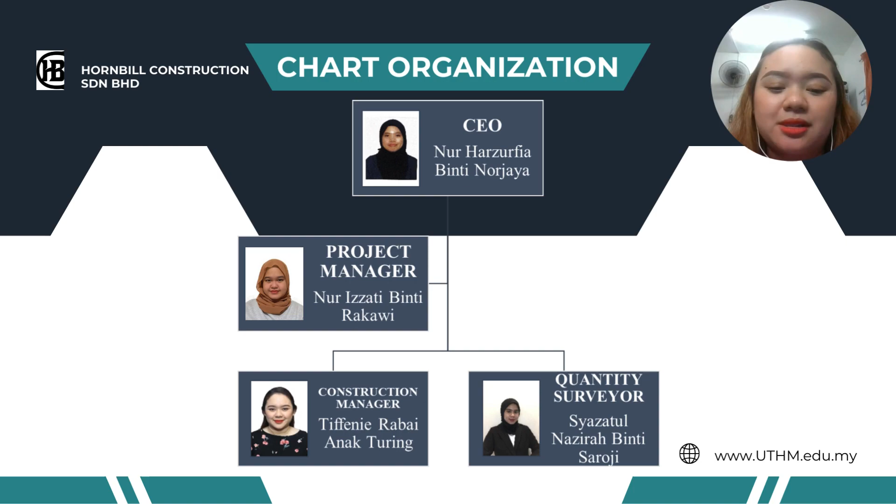First of all, before we start our presentation, I would like to introduce my group members. The first one is our CEO, Nur Harzurfia binti Norjaya. The second one is Project Manager, Nur Izzati binti Rakawi. Construction Manager, myself, Tiffenie Rabai Anak Turing. Quantity Surveyor, Syazatul Nazirah binti Saroji.

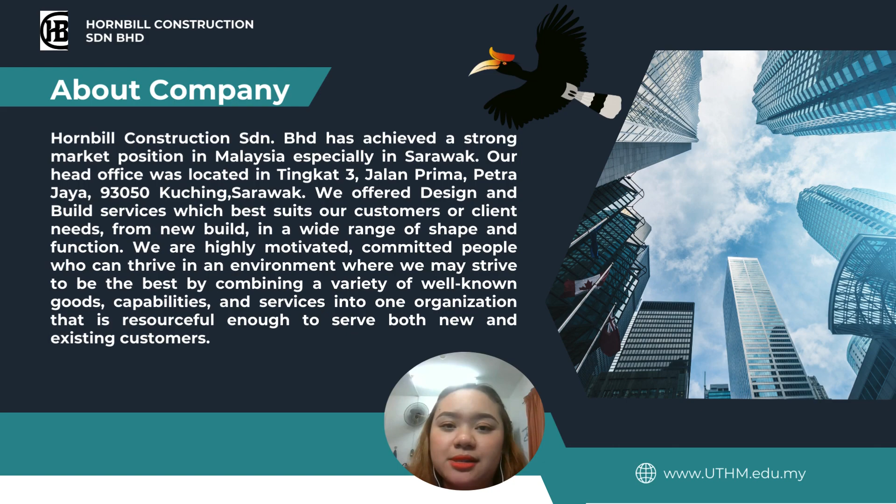About our company, Hornbill Construction Sdn Berhad, it has achieved a strong market position in Malaysia, especially in Sarawak. Our head office is located at Tingkat 3, Jalan Prima Petra Jaya 93050, Kuching, Sarawak. We offer design build services which best suit our customer or client needs from new builds in a wide range of shapes and functions. We are highly motivated, committed people who can thrive in an environment where we may strive to be the best by combining a variety of well-known goods, capability, and service into one organization that is resourceful enough to serve both new and existing customers.

Our company vision is to provide the company with sufficient competent staff, maintain a high level of professionalism, create significant added value for our clients. The last one is to advocate efficiency in everything we do to optimize productivity at minimum cost, to ensure sound corporate governance in our projects.

Our mission is to enable the organization to embrace modern management as the way of life and to be the preferred choice of engineering project management. The second one is to provide professional services by continuously making a positive impact on the industry.

The concept of the Darul Hana Development Project has become a state reference point for the ultra-modern housing industry with traditional values, because the state government was not only proposing solutions for problems faced by old Malay villages, but also seeking to protect the Malay community's cultural heritage.

According to a statement from Chief Minister Abang Johari Tunku Openg, published in Dayak Daily News, the Darul Hana project is a planned urban regeneration project for the 12 traditional Malay villages from Kampung Boyan up to Kampung Bintawa Hilir along Sungai Sarawak. In addition, this project will also be concluded with digital infrastructure, including 5G networks, in accordance with our goal of transforming Darul Hana into a smart city.

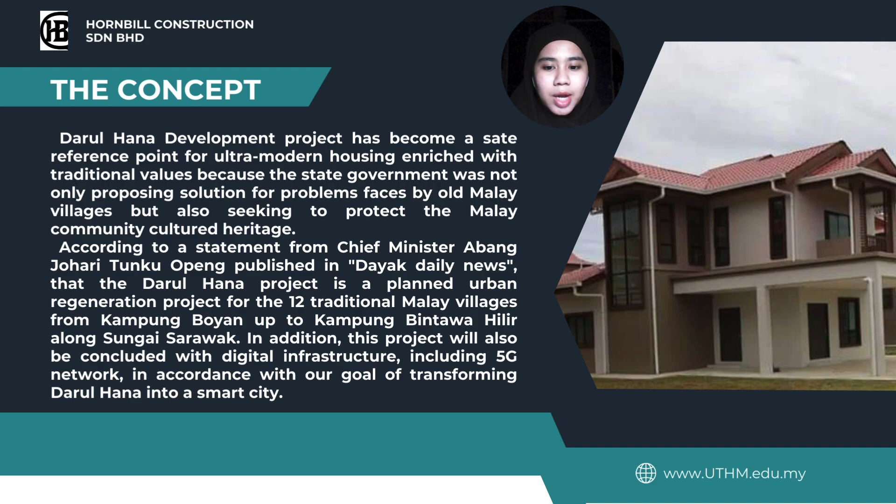Next, I will explain about the proposed proposal idea. For the proposed proposal idea, first is the size of beam, where all designs use the same beam size.

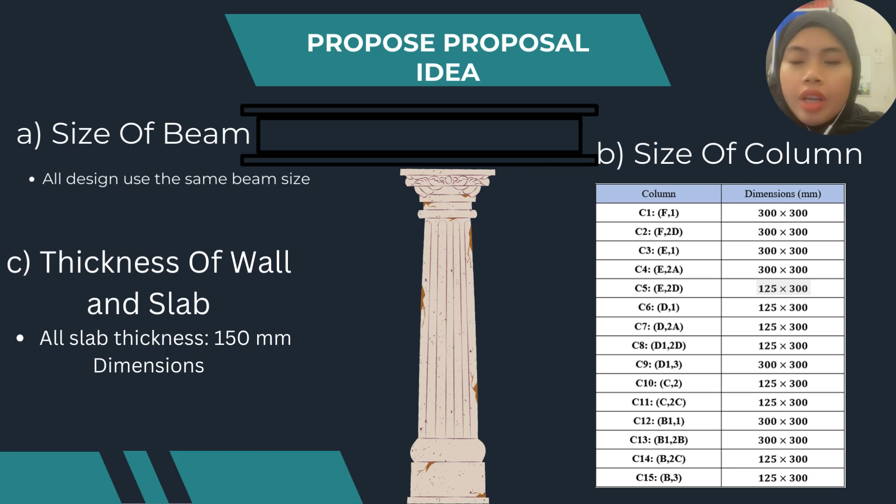Next, size of column. There are various types of column sizes, which are 300 by 300 and 125 by 300. And lastly, the thickness of wall and slab. All slab thicknesses are 150 mm.

For the manual calculation for the beam and slab thickness, the characteristic permanent load, GK, is 9.6 kilonewton per meter, and the characteristic variable load, QK, is 3.6 kilonewton per meter. For the design life, it will take 50 years, referring to the EN 1990 table 2.1, and the fire resistance is R60. This is also referring to the Uniform Building By Law. The next is exposure classes, which is XC3.

For the materials, the characteristic strength of concrete is 20 Newton per mm square, and the characteristic strength of steel is 500 Newton per mm square, and for the strength of link we take 500 Newton per mm square, and the unit weight of reinforced concrete is 25 kilonewton per m cube. So we assume the first bar is 20 mm, the second bar is 16 mm, and the last link is 6 mm.

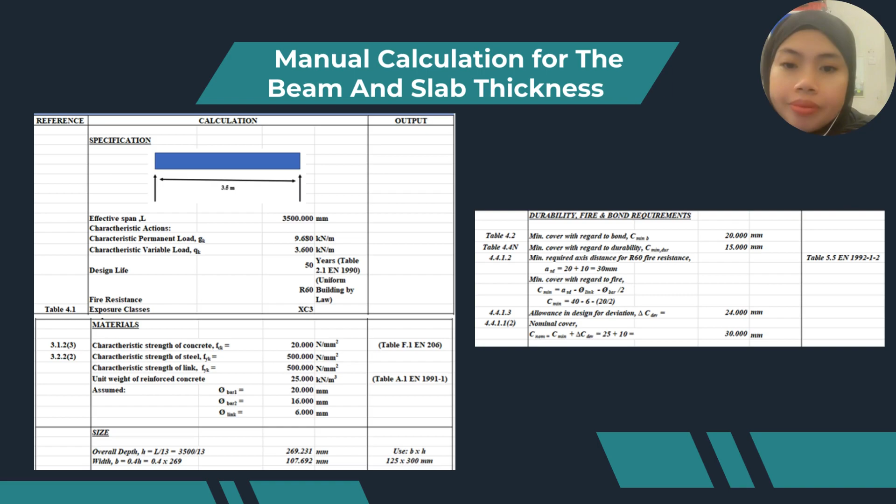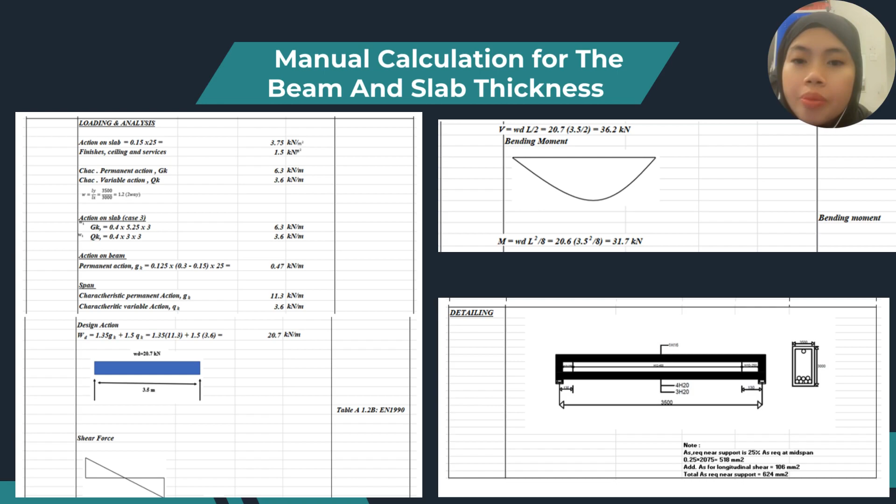In loading analysis, the action on slab is 3.75 kilonewton per meter square, and for the ceiling and surface finishes it is 1.5 kilonewton per meter. The action on slab is 6.3 for GK and 3.6 kilonewton per meter for QK. For the action on beam we got 0.47 kilonewton per meter, and for the span we got 11.33 kilonewton per meter at GK and 3.6 kilonewton per meter at QK. Lastly, there is our detailing of the beam using manual calculation.

Scheduling using Microsoft Project. Microsoft Project is a project management tool designed to assist users with project planning, tracking, and administration. The term proposed public holidays might not have anything to do with Microsoft Project's features, even though it does let you designate working hours and holidays inside a project plan.

Public holidays: in Microsoft Project, adding holidays is needed for accurate resource allocation and scheduling. Holidays can help prevent delays and improve the management of the project timetable. For accurate project scheduling, holidays must be included in Microsoft Project. By accounting for non-working days, it guarantees that timeframes are reasonable, and in addition to avoiding delays, this intelligently uses resources. Microsoft Project can determine project durations and job dependencies with accuracy by accounting for vacations.

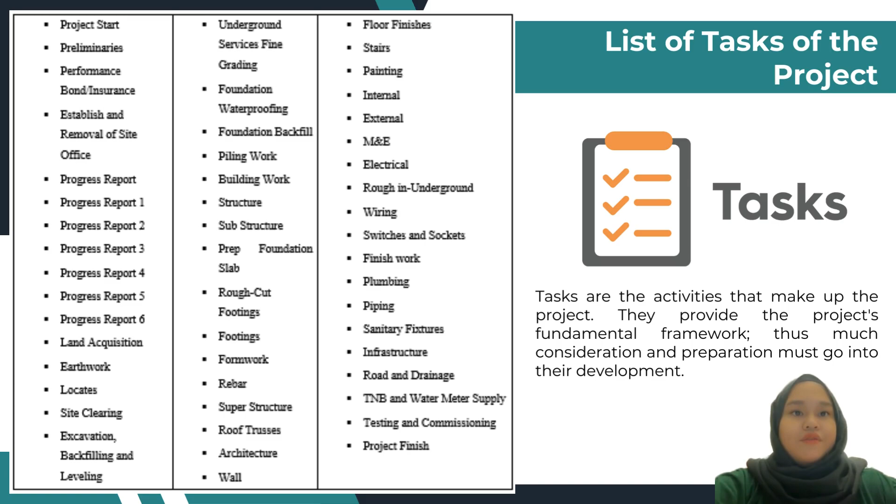This is the list of the project. There are 53 tasks in the project.

Next, I will explain about ESTEEM. Did you guys know that ESTEEM is a building information modeling, which is a BIM software company that focuses on research,

development, and marketing of architectural and structural software products for the building and construction industry. ESTEEM is a software developed by engineers for engineers with over 3,200 licensed copies in Malaysia, including the top 5

national universities and JKR. ESTEEM innovation products are being adopted and utilized in developed countries including Australia, Qatar, and Brunei,

as well as Singapore. By using the ESTEEM software, we can know the size of foundation in this housing project,

which starts with pad footing marked at P1 until P12. Then we can know the pad footing dimension and next the reinforcement of the foundation.

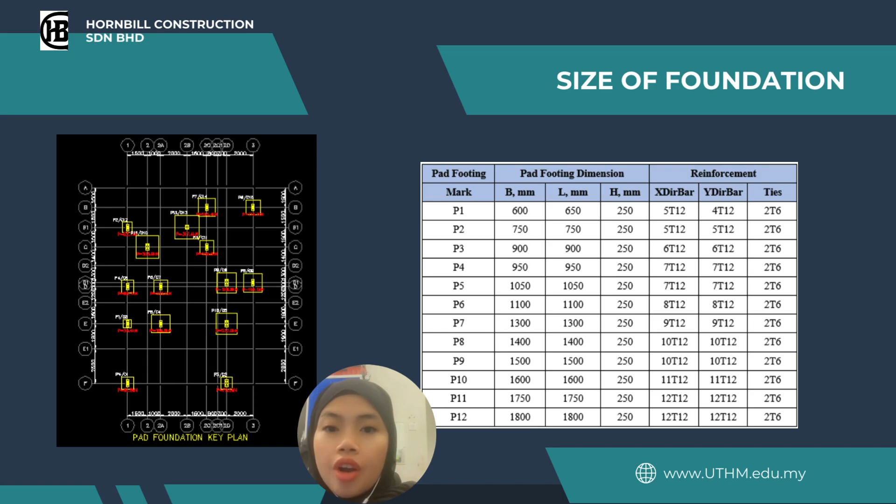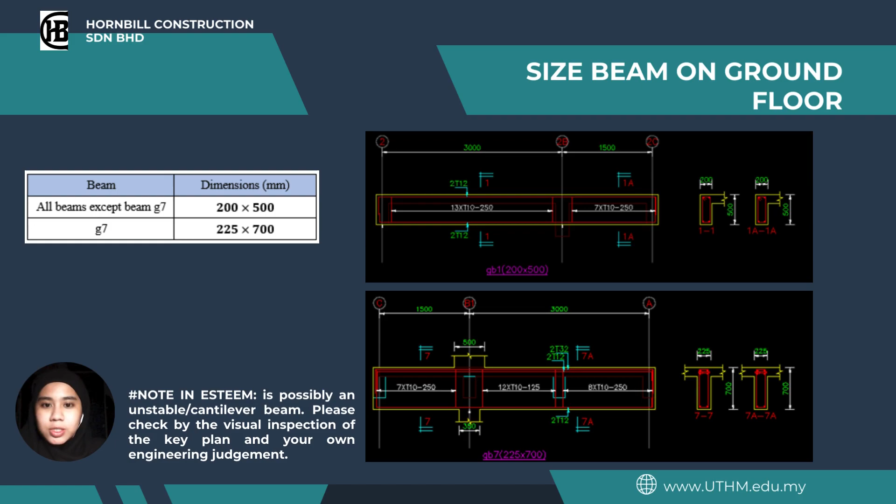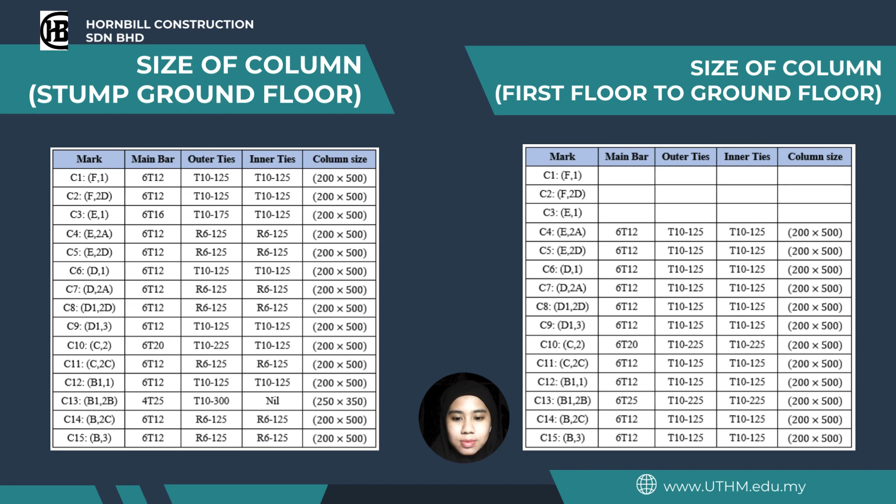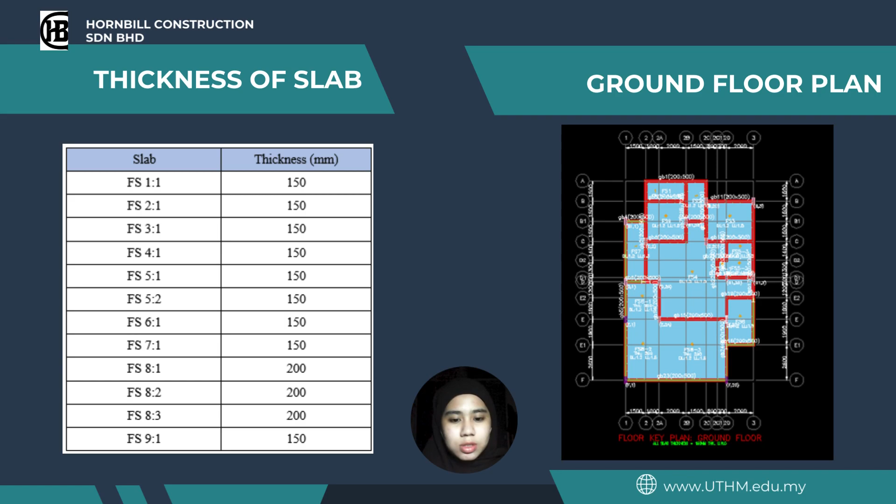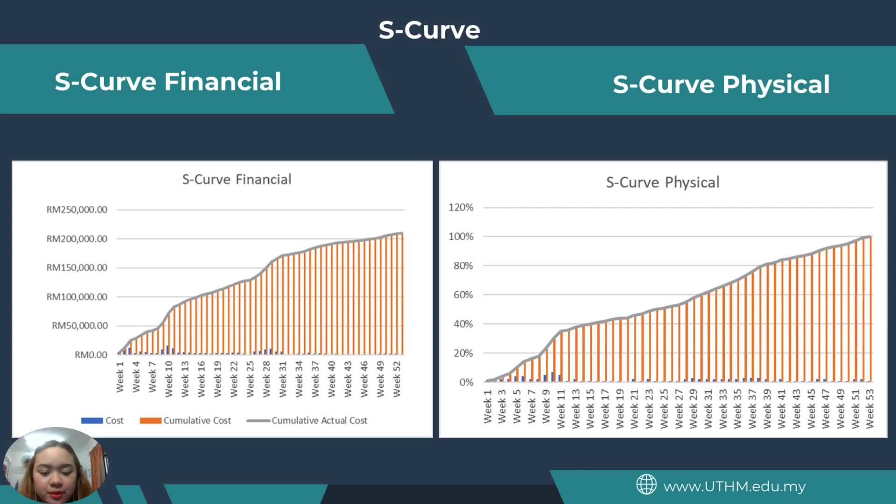For this S-curve, we have cost and cumulative actual cost. Both of these graphs go from week 1 until week 53.

For the practical innovation of Darul Hana housing, some of the factors that can be considered in innovation of Darul Hana housing project are space optimization. Increased living area in double-storey housing provides extra living space without expanding the house footprint.

Aside from that, there is separation of areas of the housing spaces.

The vertical design separates public and private spaces more effectively. Bedrooms are frequently located on the upper floor to provide more privacy. This can make the owner of the residence feel more comfortable when living in this Darul Hana housing.

In addition, aesthetic appeal. Darul Hana housing allows for a wider range of architectural designs and styles, giving visual diversity to neighborhoods. These appealing designs will entice individuals to buy and reside in the Darul Hana apartments.

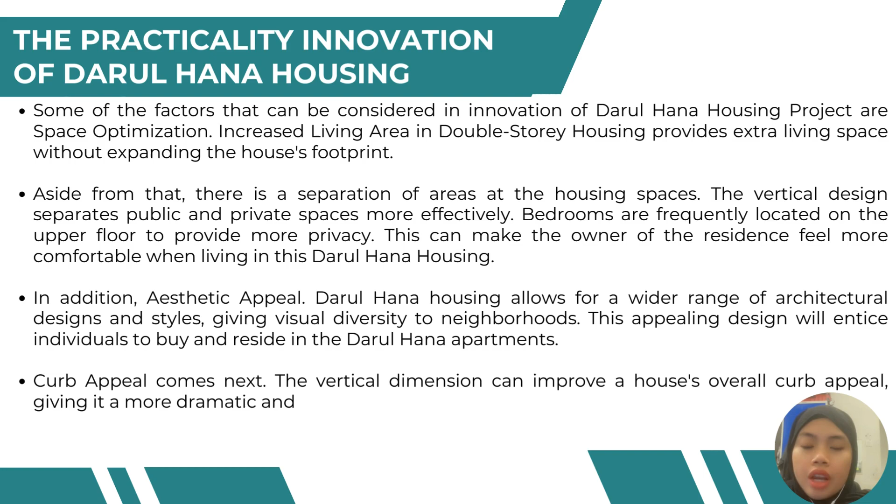Lastly, the curb appeal. The vertical dimensions can improve a house's overall curb appeal, giving it more drama.

The safety requirement of Darul Hana housing project. Following several construction codes and standards is necessary to protect Darul Hana's tenants from hazard.

To guarantee that the design, materials and construction techniques adhere to specified safety requirements, structural integrity is the priority and requires compliance with the Malaysian Uniform Building Bylaws (UBBL).

The foundation and structure must be strong to survive seismic activity and other environmental conditions.

To avoid electrical hazards, electrical systems must adhere to Malaysian regulation. Appropriate insulation should also be installed to lower the chance of electric shocks.

A healthy interior environment requires sufficient lighting and ventilation. To avoid accidents, balconies and stairs need to be built to safety codes with the right rails and non-slip surfaces.

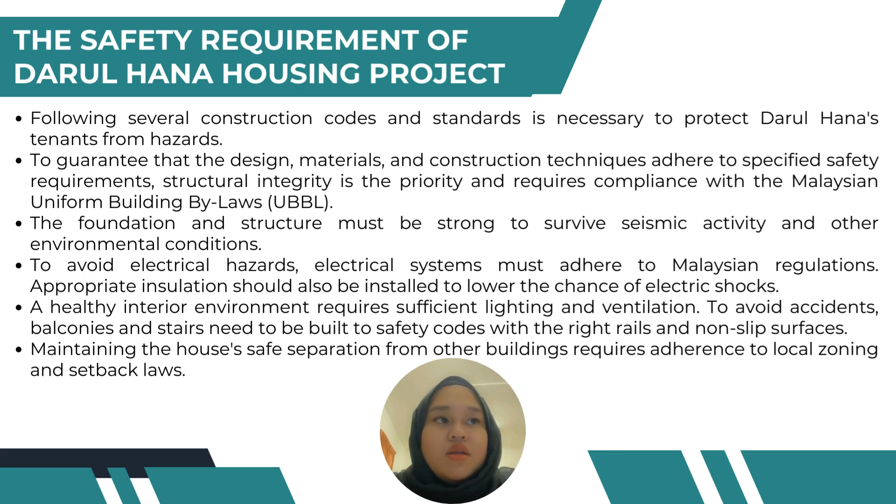Maintaining the house's safe separation from other buildings requires adherence to local zoning and setback laws.

Next, efficient field implementation of Darul Hana housing project. Some essential variables for the effectiveness of field application for Darul Hana housing were understanding and complying with Malaysia's building

code, environmental standard and planning regulation with permits and approval from local authorities.

Darul Hana practices green building, considering energy efficient design including environmental friendly and sustainable building techniques. Other than that, using effective technology to communicate, collect data, and manage the entire project.

For infrastructure development of Darul Hana, it analyzes and schedules the construction of any essential infrastructure, including sewage, water, and power systems.

In designing house units, they are resilient to Malaysia's tropical climate. This housing area creates several uses in order to maximize the use of available space.

Lastly, the important part of designing housing is to ensure that the housing is accessible for people with disability.

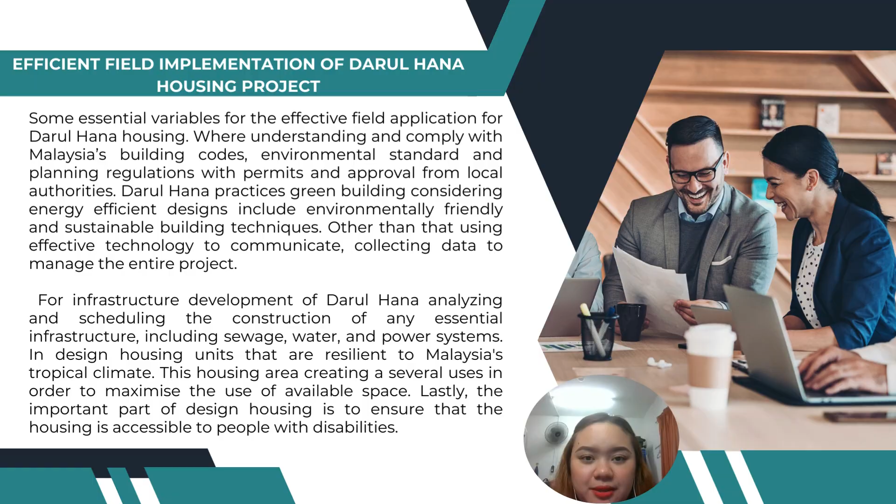Cost-effectiveness of the Darul Hana housing project. As a result, the planned duration to finish this project is about 296 days, where the project started on 1st

February 2023 and finished on 31st January 2024. The total cost of the project is about 210,000 for all construction work that has already been specified.

The cost of building a Darul Hana house is cheaper than the cost of a two-story house that should be obtained, because this project is under the government to help the villagers.

Its costs included the wage of workers, machinery sale, and others. Subdivision and earthworks, substructure and superstructure work, survey system work, architecture work, M&E work, and site cleaning are among the tasks for this project.